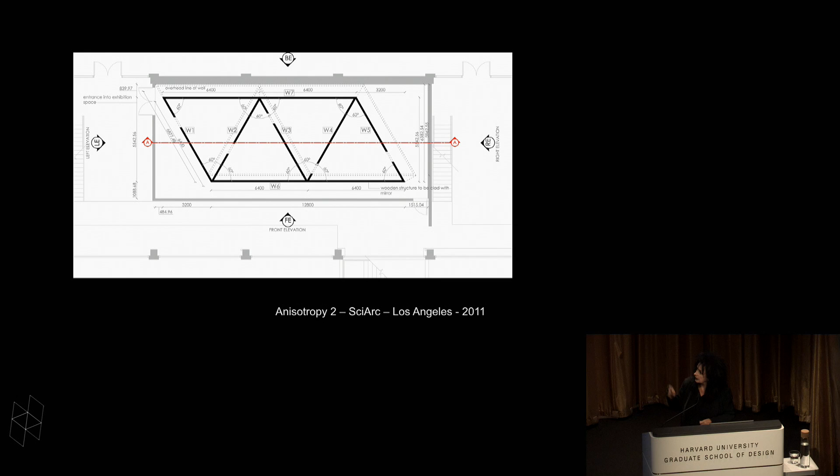So when you come in, you see it from above. You see the object which is inclined, and inside you don't perceive what the space is. You can't understand the space because, again, of the reflection.

You don't know where the limits are between the walls and the floor. Is it a door, a passage, or just a reflection of another one? Where are the passages? So you play, you enjoy being there because you have to find your own way, and you don't understand the size, the space, the form of the space.

And I love to play with that, as I said before.

In Milan, every year in the furniture fair, they ask architects, artists, and designers in a university garden to do something with a factory. They asked me to work with a ceramic factory, and they wanted to propose ceramic pieces which were 3 meters long and 1 meter wide, but only 3 millimeters thick.

They were thinking I would show that as a floor and walls, etc. But I wanted to express the extreme thinness of the ceramic by sending them up, crossing steel to maintain them vertical, building like a cube but cutting it with something like a balloon passing through, so you could come in and walk on the edge of the ceramic, which is 3 millimeters thin.

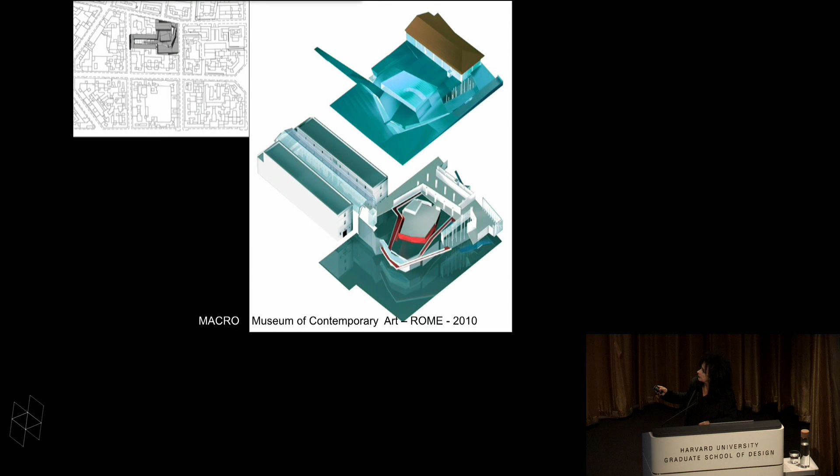So we are at the corner of the two streets, and this is the new entrance.

And the glass box here is a cafe, because we are in Rome, and in Rome, in every street there are cafes, and you go to drink coffee everywhere. So I wanted to have the coffee in the street. There is no coffee at the moment. So the entrance is to come into the cafe.

The glass box is suspended from the existing facade that I had to keep on both sides. To come in, you have to pass under the cafe without columns, the box is flying above. And you have to cross the little garden with the trees, going very fast to the roof, to enter into the foyer.

And the foyer is black. Everything inside is black. It's the first time that I use black in one of my buildings. I know that everybody believes that I build in black, but this is my first building in black.

And if you look carefully, the floor is basalt. Basalt is a stone which is used in the pavement in Rome. So the city is coming into this.

This is back. I want to go back, but I don't know how to go back. There is no way to go back. Doesn't matter. So I have to make no mistake.

So the floor is the continuity of the street. So this is a public space, internal public space, which is running everywhere. And in the middle of that, we have the auditorium.

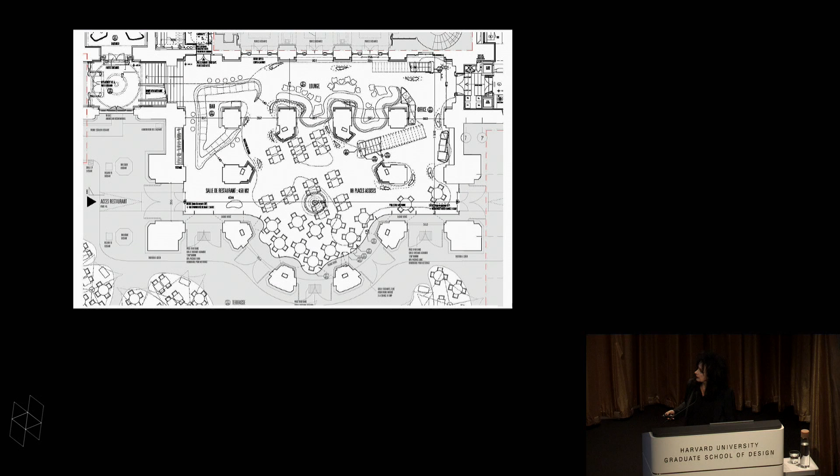Okay, so I had to close the space, so I started by doing this sinuous line behind the columns. Because I know how to work with glass, I was thinking that by creating volumes of sheets of glass, sinuous, they would be self-stable and anchored into the floor. And if I use very clear glass, they will not see that there is no facade. Okay, and it was agreed.

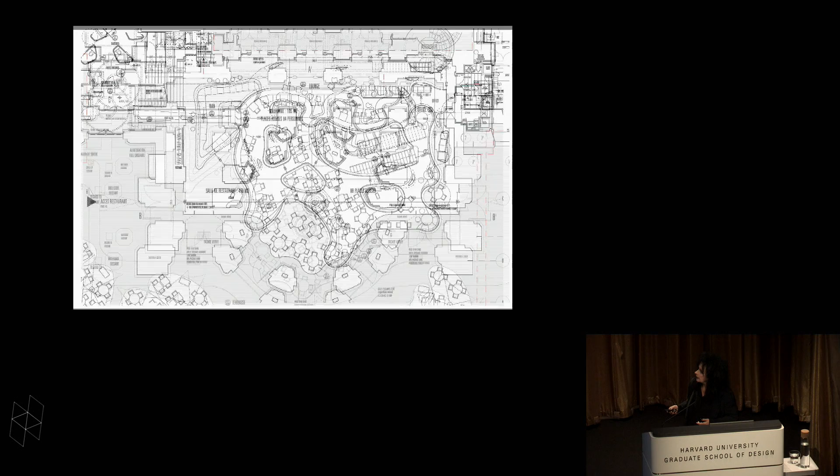After that, I had to create a mezzanine. So I continued the sinuous lines, again without touching the columns, without touching the walls.

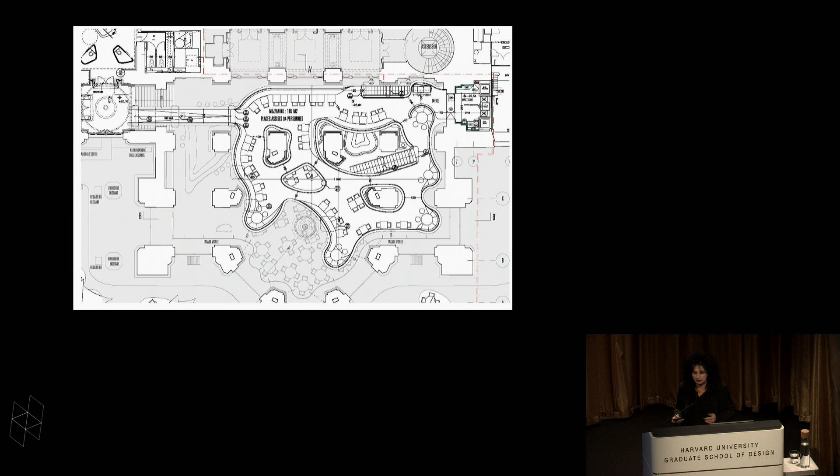The position of this line was a long negotiation between me and the National Commission for Historical Monuments, because they wanted me to go back, so that people coming into the restaurant would see that they are entering into the cupola, seeing its center. So this line has been a negotiation. At the end, they agreed, and it's like that.

So this is sheets of glass coming up, undulating, up to 6 meters high at the height of the cornice, and another sheet of glass above. In between them, to hold them in place, there's this little piece of steel.

Inside, the mezzanine is built in steel structure, surrounded by molded plaster. When doing this, I had to push my columns back close to the other columns without touching them, because they didn't want any columns in the middle of the cupola. That means this part of the mezzanine is in cantilever of 10 meters.

By doing that system of construction, I did exactly as Charles Garnier, because Charles Garnier won the competition for this project in 1861, when he was 35 years old. He was modern for his time, so he decided to build the structure in steel. So what you look at as stone columns is actually a steel structure surrounded by stones, with shafts for ventilation and heating in between. I did exactly the same.

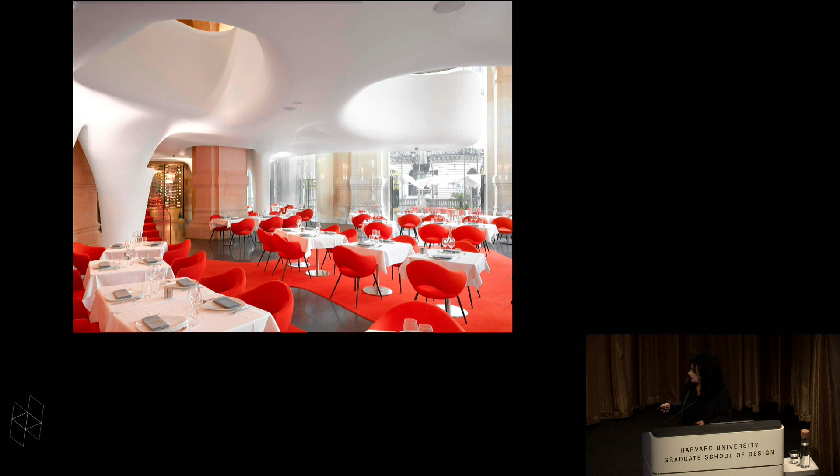A steel structure surrounded by molded plaster, with everything technical inside, turning and twisting with this molded plaster, using acoustic plaster and different kinds of plaster to make it absorbing. Because of the mineralization of the space, the floor, the walls, etc., I wanted an absorbing system.

In the back, there is a lounge with a long sinuous bench, or sofa, with doors coming directly to the foyer of the opera. Underneath, it's like being under an animal, a very strange animal.

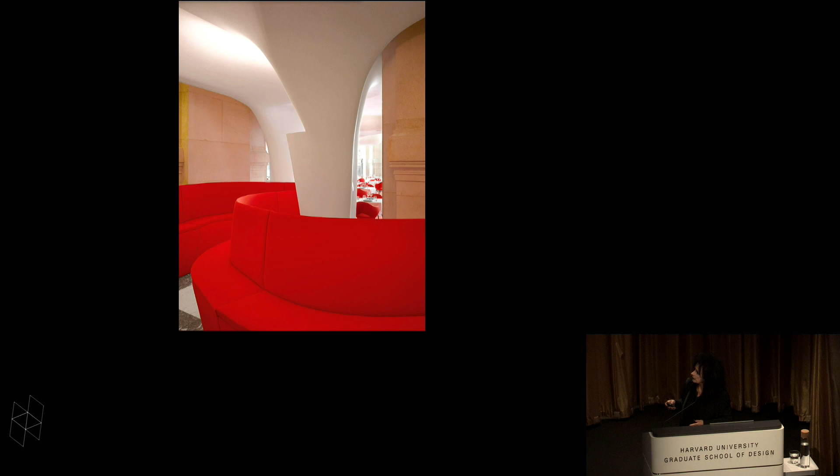Everything is red and white. The lighting devices are tucked in the legs of the animal, because I didn't want to see any technical device in the building, since they were not visible in Charles Garnier's design. Everything in the mezzanine is red - the seats, the table, the benches, and the sofas.

There are mirrors to enhance the impression of space. If you look carefully at the height, the top of the glass has been cut depending on the cupola, and every sheet of glass is different - the sinus, the curve, and the cut at the end are all different. This is not anchored into the stone; between the glass and the stone there are 4 centimeters of silicone joints.

I also did another museum in France, in Rennes, in Bretagne, in a park in a new development area, where there was before this piece of art. This piece of art is the unique 3-dimensional piece by an artist called Aurélie Nemours, a French artist. She works only on numbers, and this piece is on number 9.

Every stone is 4 meters and a half in height. The section is 72 by 81 centimeters, and the angle of the position of the square - because it's 72 stones - is at the specific angle of 9. She gave regulation to the architecture. Usually it's the architects who give regulation on architecture, but here it was an artist who gave the constraints.

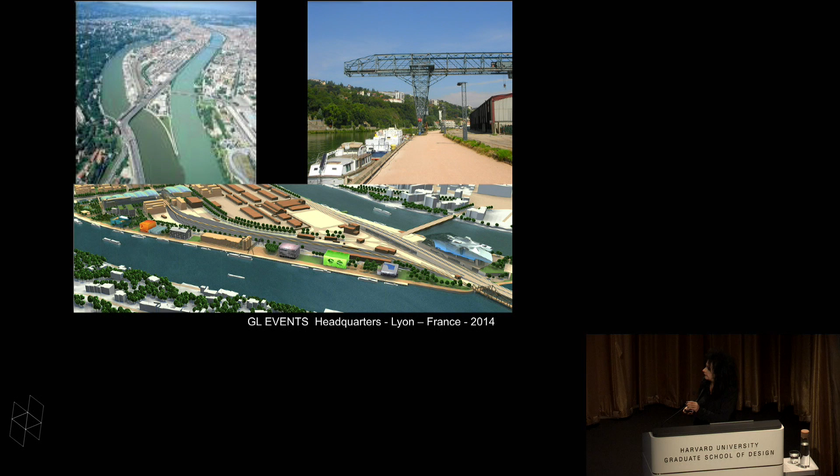In Lyon, we developed and won a competition in 2005, built in 2014, and we are on the peninsula with the Confluence. This is the old harbor of the city, with these cranes still there. And at the end of the peninsula, I won the position for this building.

This building was supposed to be a parallelepiped, and I decided not to do a simple parallelepiped, but to shift the top part above the riverbank. Why shift? Because I wanted a building in cantilever - 1, 2, 3, 4, 5 floors in cantilever above the riverbank. In the middle I had an atrium, so I shifted the atrium, and the atrium passes above.

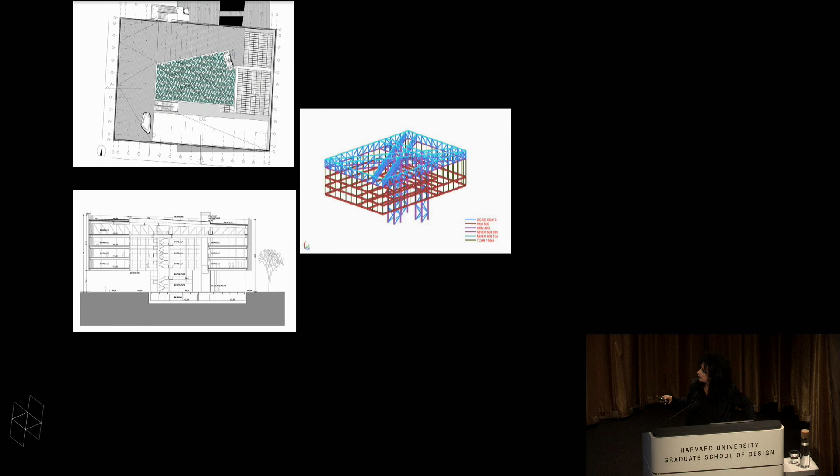To build that building, we built at the beginning 3 pylons, a cross of beams, perimetral beams, and we hung everything - so we built from the top to the bottom, the inverse, like that. And at the end, this is a building in cantilever above the river, above the bank of the river - 25 meters of cantilever.

On the facade, what you see is a picture, a photo - it's an artist's piece, because we were asked for the competition to work with an artist. I decided to work with Felice Varini, a Swiss artist living in Paris, who works on the question of perspective and point of view. I told him, Felice, I have a building - my proposal is very simple, this is a parallelepiped. Can you transform the perception of my building?

And he said, architecture is very arrogant, because when architecture is installed on a landscape or cityscape, it erases the landscape which was there before. So I want to replace the landscape on your building to erase the architecture, but in black and white. So he took pictures virtually on top of the building, on the four directions, and we reapplied the photos of the scenery onto the facade.

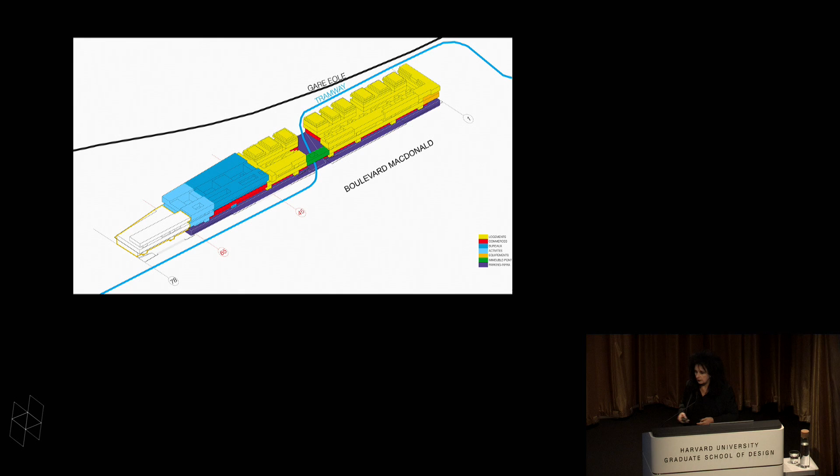So this is a huge building, 600 meters long, with multi-story facilities and a commercial center throughout the whole structure, and two floors of car park underneath that they built.

My building is an incubator for startups, so I decided not to have a normal office facade, just to make bubbles. On the south facade they are white, on the north facade they are black, and in between, on my east facade, they are black and white.

As soon as I did that for the facade, I decided the building would be only black and white, except some bubbles in red—why not? So when you enter, this is the entrance, black and white.

Above, there is a flying bubble for meeting rooms. At the back, there is another meeting room bubble, red, black and white.

You can enter into the bubble with a passerelle, and inside you can sit along this table, which is not a normal shape, but you can sit by 2, by 3, by 4, even by 10 at the end if you want—but you are always as you want.

We designed the carpet also with bubbles, etc. On the lift floors, when you arrive and push the button, there is one black lift or one white one coming—you never know.

At the first floor, you have these big meeting rooms and conference rooms, red again. On many floors, you have a convivial space, as they call it, where we designed the furniture so people can rent a seat or rent the floor to sit and work, like a co-working and informal space.

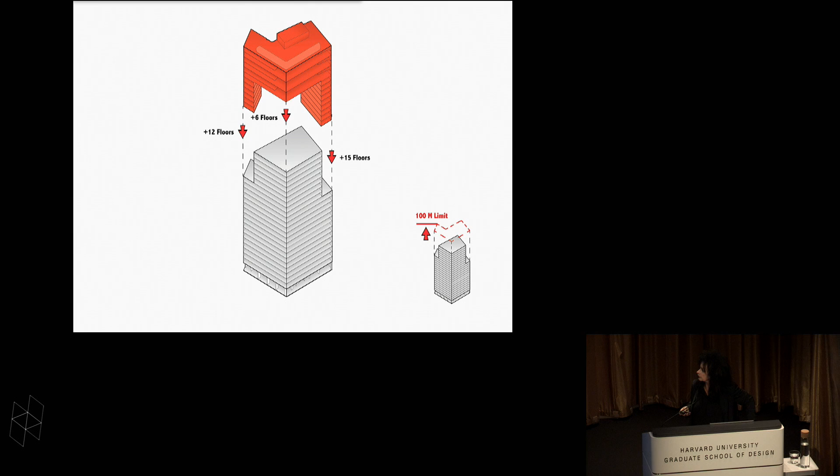With a floor which is 10 meters high for the lobby and the restaurant, using again this curved facade on the back of the existing columns. By chance, the company doing the curved facade for the opera is based in Barcelona, so we worked with them, discussed with them, and asked until which height we could go. They said 9 meters, so I said okay, we will do 9 meters this time. Each piece of glass is 9 meters with specific curves. Playing with curve glass is nice.

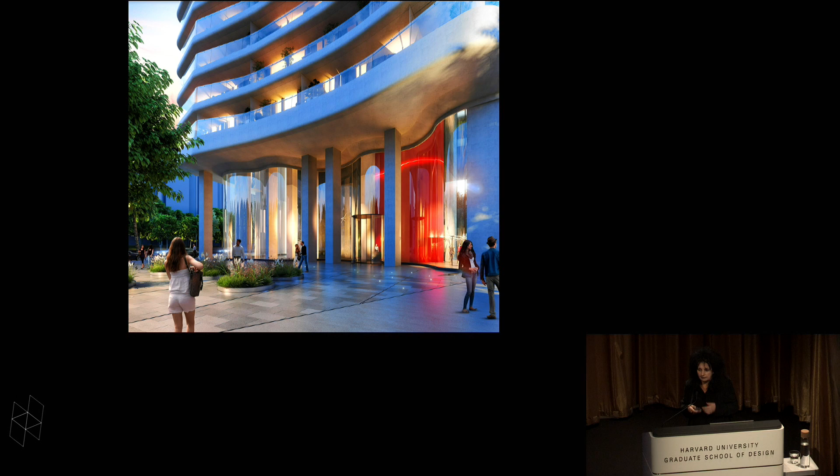On the back this is more thin, and on the top there is a swimming pool that you can swim in, looking at the sea at 100 meters high. And some red balconies. No, black, red balconies.

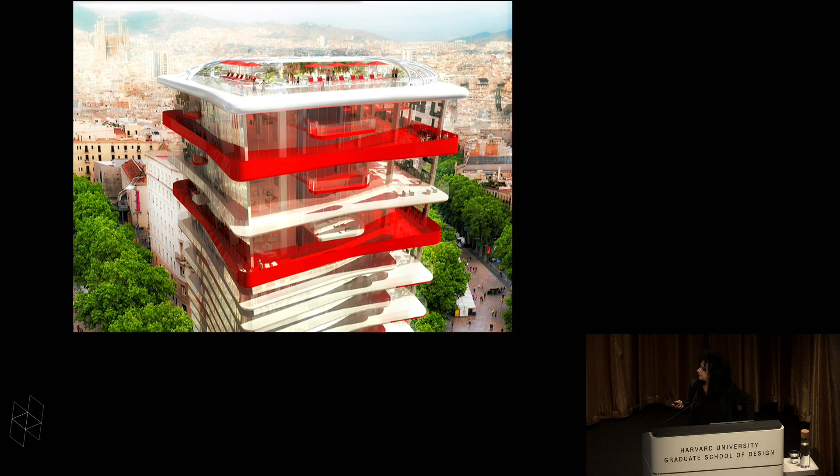I did, sometimes, very little project. I have been asked by an art collector who owns this, how can I go back? It's stupid, it doesn't work. Thank you, okay, I'm stupid.

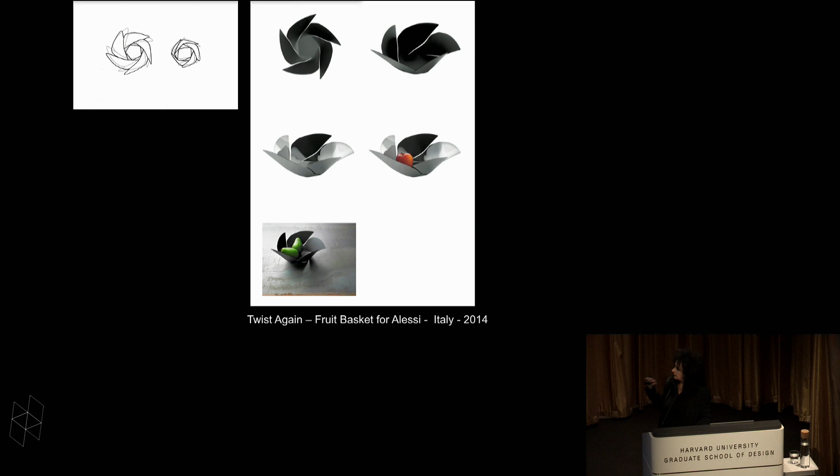And because the two rectangles have been shifted, the side is not regular. So you can't take my tray in the middle of the side as usual to carry it. You have to take it like that, and carry it like that. It's not nice. So I call it Alice, because it's Alice in Wonderland - what you see is not what you look, or what you look is not what you see, because it seems not to be flat, and it's absolutely flat. And I did a fruit basket to make the fruit go outside.

Oh no, my God, what happens? I repeat that, no.